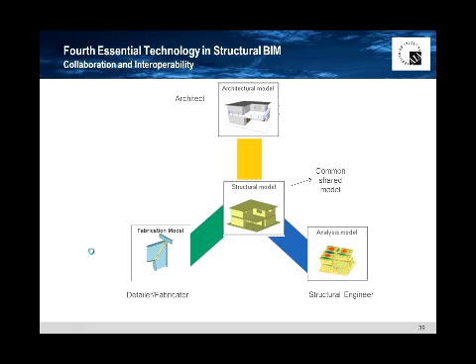IFC is an open standard that has been developed by the software industry under the name Building Smart for the purpose of exchanging BIM models. It's supported by all BIM modeling programs.

project management applications that all support IFC and Open BIM. Another important part of collaboration is how we share models. Today, that exchange typically mirrors the traditional 2D paper process. However, emerging BIM server technology is promising to make this file exchange process much easier.

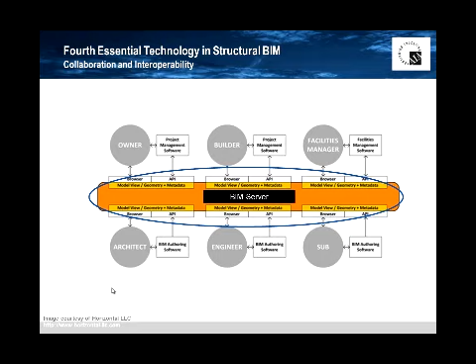With a BIM server, teams will manage and control project information from a central BIM server database hosted either in-house or in the clouds. With new BIM server technology, models from the stakeholders will be uploaded to a central database where team members then can download the information they need for their jobs. And as changes happen, the team members will simply upload their changes back to the database.

When a change is received, the BIM server will update the reference BIM model and then send a notice to the rest of the team letting them know that new information is available and ready for download. It will also track revisions and store them in the database.

And with a BIM server, you could do more than just easily exchange models. You could also query the model for information and do things like view and track project materials, generate workflow approvals or schedules, bill of materials, estimates, and other reports.

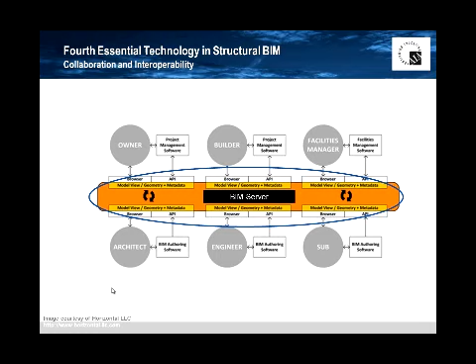And this emerging technology is based on open standards, allowing team members using different softwares to easily plug in and participate in this new exchange process.

Perhaps even more important to improving collaboration are new project delivery methods like IPD or Integrated Project Delivery, Design Assist, and others. Organizations like the Building Smart Alliance through their National BIM Standards initiatives, the AIA with their E202 documents, the AGC with their 300 series consensus docs, and others are driving Open BIM and helping to define model exchanges through their BIM execution planning documents.

These new methods, planning documents and agreements will help firms better collaborate and make it easy to share data by helping them define what information we exchange, BIM models, drawings, specifications, who owns the BIM model, and when, where, and how these exchanges will happen.

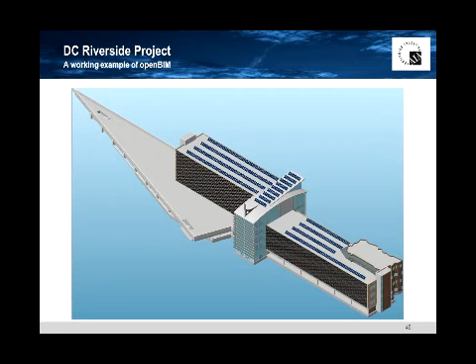Now, let's take a look more specifically at how this exchange works in a structural BIM process. For this presentation, we'll use the DC Riverside project as an example project that illustrates a BIM workflow between the architect and the structural engineer.

As is typical today, teams in this project all use different BIM authoring tools, i.e. the tools they felt that worked best for their part of the design process.

This project used the AIA documents E202-2008 and BIM Protocol Exhibit as a guide to manage the BIM model development and exchange. One of the benefits of this document is that it clearly defines who's responsible for what at the various stages of the model/project progression.

This document introduces the concept of model LODs, or what we call level of development, for each stage in the design process. These LOD stages somewhat overlap the traditional workflows, but instead of 7 or 8 stages with very unique aspects, there's only 5, which focus on the development and the details of the BIM model and the responsibilities of each of the team members.

While the stages appear linear from general to specific, it really promotes an iterative design process where team members are involved early and regularly review and exchange model information.

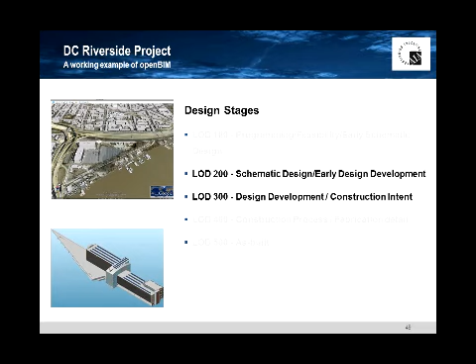For the purpose of this demonstration, we're going to focus on the LOD 200 and LOD 300 stages of model development.

Now, this project started with an architect delivering 2 files, the LOD 200 model of the architect's early concept of the architecture and an LOD 200 model of the architect's early concept of the building structure. Being able to reference and reuse the architect's information is a huge benefit in working in a structural BIM workflow.

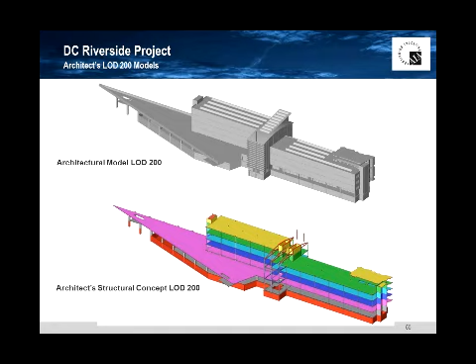Here you can see the 2 models together in the structural design software. Why 2 models? Well, having the architect's model as background geometry really helps me better understand the architect's intent and reduces the number of RFIs. Having the structural model means I don't have to start from scratch.

Instead of having to import 2D CAD drawings and remodel the structure as I would in a traditional analysis program, I can reuse the structural geometry the architect has already created. In this model, floor slabs transferred in as 2D elements and beams and columns as 1D elements. From the architect's model, I can now begin to quickly verify and, when necessary, clean up the architect's information.

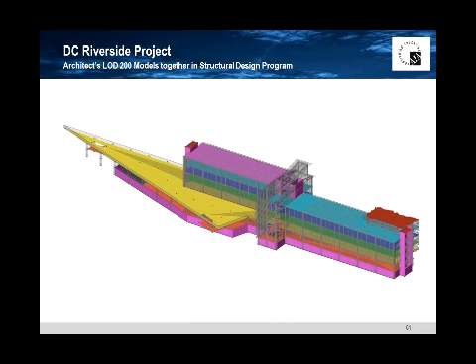This concept of being able to clean up an architect's model is another important requirement in structural BIM. As you know, architects and engineers think of structures differently. Architects tend to think in volumes. For example, in walls, they can sometimes mix up divisions of constructions. Essentially, they don't think of the structure as a real, coherent structural model needed for analysis.

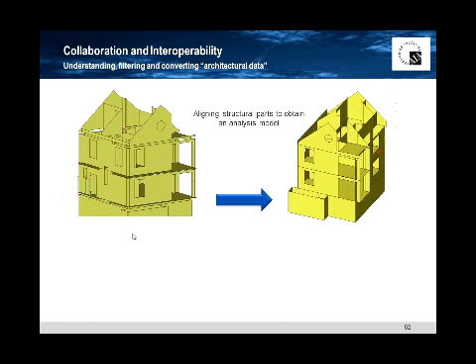So, how do you go from the architect's model to a proper analytical model? Well, with traditional analysis software, this is either impossible—I have to remodel my building in my A&D software—or the cleanup is very tedious and time-consuming.

Here's an example of what I'm talking about. Here we have a column as it would be designed in an architectural program. But we need different information. We need this schematic representation—the plate, the foundation, the column, the beam, being described as bars and nodes.

The ability to convert architectural objects into structural objects is another essential technology in structural BIM. And this conversion needs to happen in a semi-automatic way that allows for input from the engineer, keeping him in charge of how the analytical model goes together.

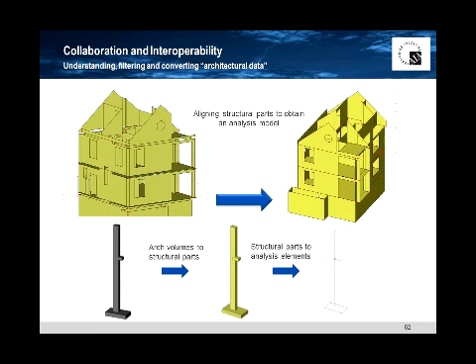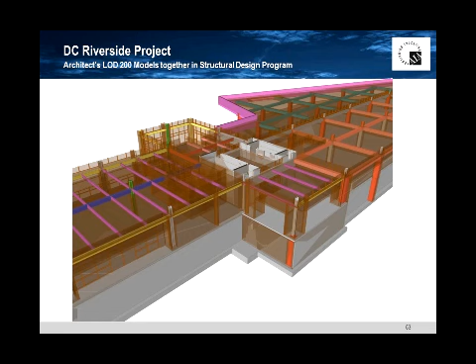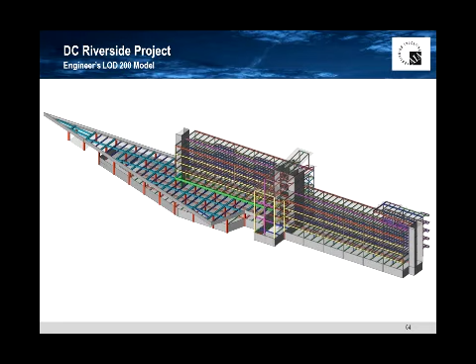So from the architect's early stage LOD 200 models, we would use rules of thumb and maybe some light analysis to return to the architect our early structural concept model, or the structural LOD 200 model. This model would be returned to the architect for validation before we continue.

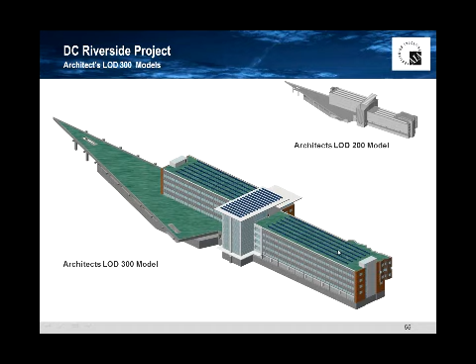In this project, as is typical, the architect, owner, and contractor evaluated the early design and decided to make some changes based on cost, constructability, and aesthetics. Here you can see the architect's more refined LOD 300 model. In this project, the tower roof was simplified to a flat structure, and the east wing penthouse was developed into a full floor.

From the architect's more developed LOD 300 model, we reworked our structural LOD 200 model to incorporate the changes. The result is a more developed LOD 300 structural model that is now ready for loading.

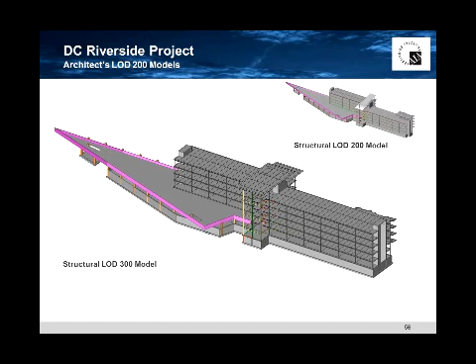Next, we set up the model for wind loads. In this example, we modeled the cladding as load panels. This gave us the ability to accurately represent the cladding mass and gather and distribute the wind loads, but not affect the stiffness of the structure, which, as you know, is important for seismic and other dynamic calculations.

With the wind loads defined, we continued to add load and load combinations as necessary. Then, with the structure fully loaded, we moved on to analysis and design.

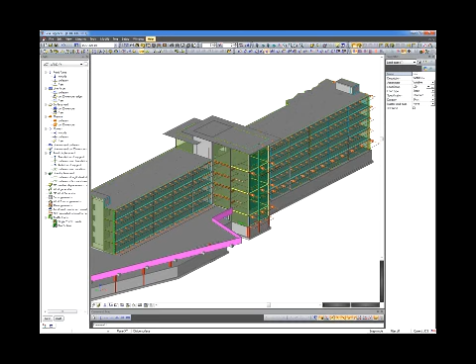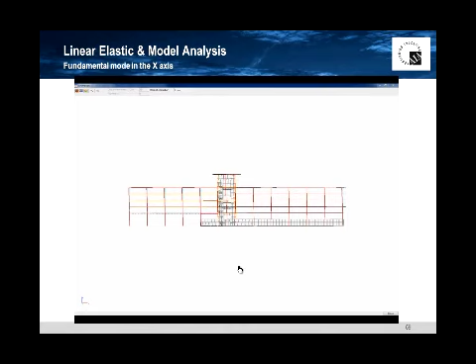Here, we're looking at the fundamental mode in the x-axis. And here, we're looking at an animation that represents the tower's central core deflecting under seismic excitation.

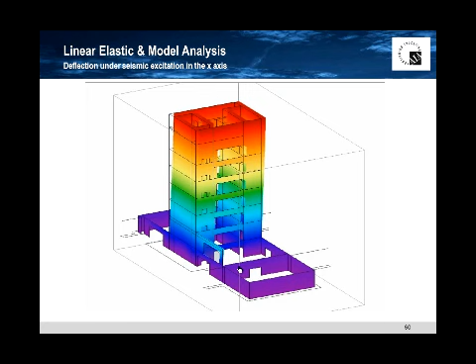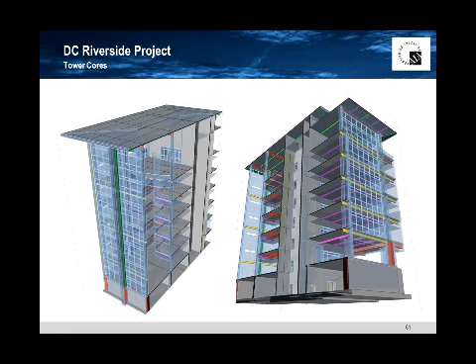Now, the central tower portion of this project required some special attention. The tower housed the building's mechanical systems and service cores, as well as a 6-story open atrium.

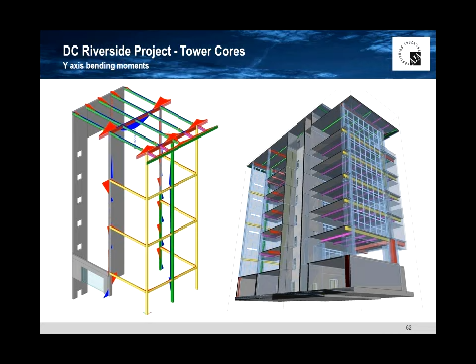Here you can see the y-axis bending moments on the tower atrium steel frame. And we can see these results graphically on the physical model of the structure. This ability to integrate the physical and the structural model means that we can visualize instantly how changes like editing a cross-section, adding some bracing, or moving a member will affect the physical structural model. This was important in this project as the tolerances for the mechanical systems were pretty tight.

And of course, while we're working on the model, the program is automatically creating and updating our documentation.

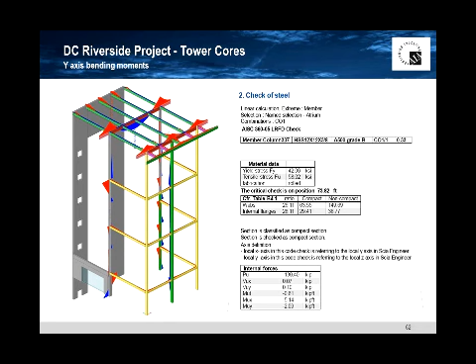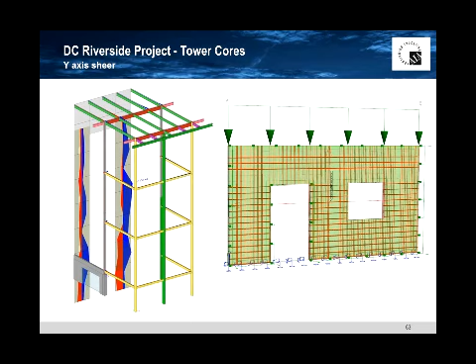If we take a closer look at the service core, we can see the y-axis shear on the tower core walls. And because we can integrate design analysis with detailing, we could use these values to optimize the tower core's reinforcement. The same is true for foundations, shear walls, and other reinforced elements.

Because all structures are tied to the ground, it's important to consider the effects design decisions have on the soil structure interface. Here you can see the bearing stresses in the soil, and if needed we could design piles for the supports. Having to switch between software packages or modules to accomplish foundation design presents another workflow bottleneck and opens up the possibilities for error.

This is one of the reasons why we're starting to see general FEA software include geotechnical modeling that has traditionally only been available in specialized systems.

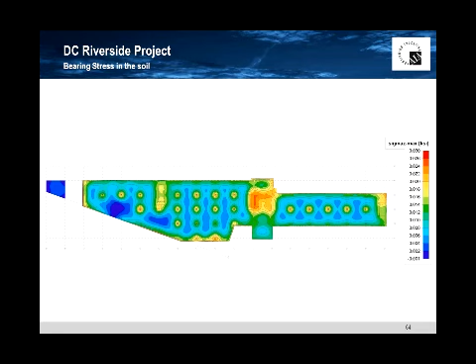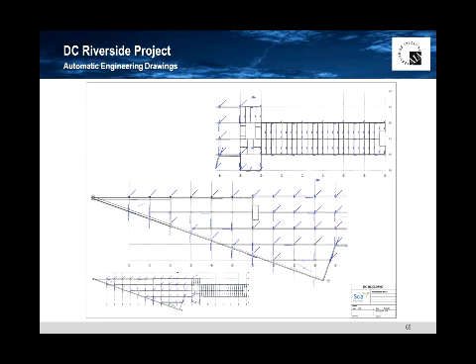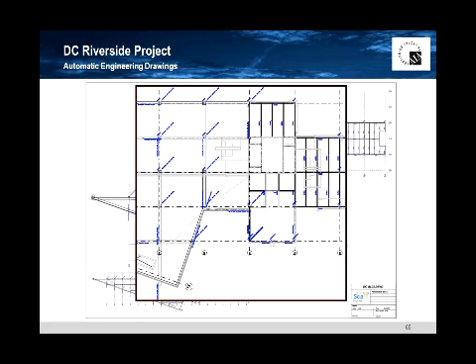Once we are finished with the design, we can begin to document our project. Here you can see a typical framing plan that was automatically generated from the 3D analytical model. Also, because we have maintained the architect's model in the background, we can give a much more complete representation of the structural system within its actual context. Here, the background geometry of the architect is displayed as gray in these drawings.

And here are some section drawings generated from the model. Of course, these drawings are linked to the model, so they will automatically update as the design changes. And you could update these drawings and drive changes back to the model. These drawings can also be exported as DXF or DWG drawings, or shared as PDFs.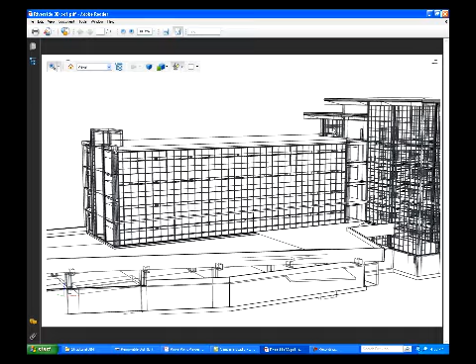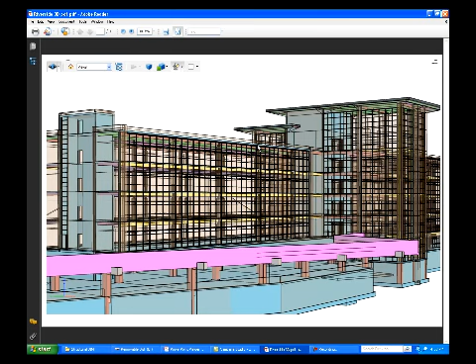We can then change our rendering settings, and you can see the structure and the architecture together, giving engineers new ways to communicate their design ideas. Again, this presentation didn't require any special software or extra work. It comes as a side benefit of having the model and using open standards like 3D PDF.

In this project, the architect's original design called for a tall, brace-free glass curtain wall in the lobby atrium. These large, unbraced column lengths required very large and expensive built-up cross-sections. After further review of the LOD 300 structural model, the architect decided the cost of these large columns was not worth the aesthetic effect. So we conferred and jointly decided on the location of the new bracing.

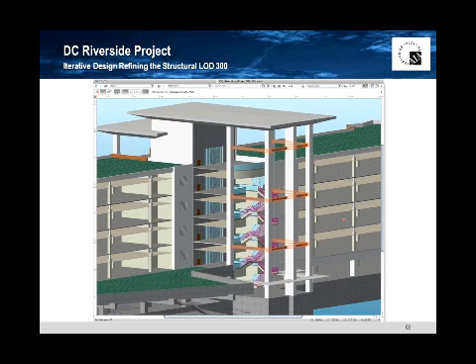In this slide, the architect is notating in his architectural model one option for the location of the bracing. Here you can see the updated structural model in the structural design program. We reran the analysis, finalized the structural design, and then sent our changes back to the architect for his approval.

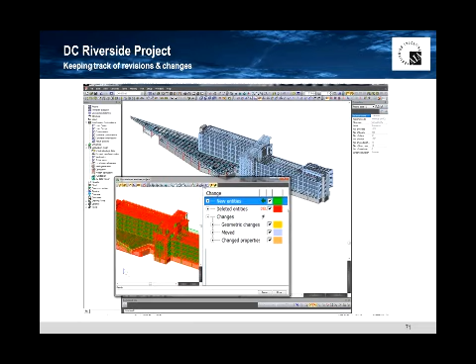During this process, we were able to track and store changes. In this case, the structural design program created a project archive of all of the iterations of our design. Using the same iterative workflows, this model was then further refined until the design was complete.